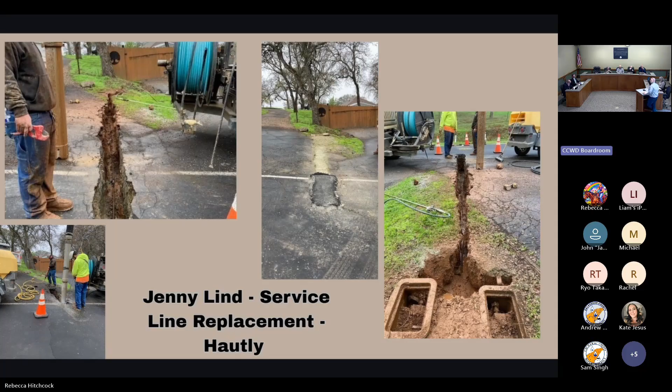As we like to start every operations report with Jenny Lind distribution system, it's no different here. So, an example of service line replacement on Hautly. As you all know, we have a utility crew focused solely on replacing service lines. Right now they're on Baldwin, so they're going to continue down Baldwin and Rancho Calaveras until those services are completely replaced. Oftentimes the distribution crew, which is a separate crew completely, will expose a service line to make a repair and then find themselves in need of replacing it. That's kind of what this is an example of. So they blow down, they see what's going on, and then they just make the call that they're going to replace the service. In this case, you can see it's a dual service, we call it, to two different meter sets, shown in the bottom picture on the right.

Okay, and then this is an interesting one. This is at the La Contenta waste plant. We have a potable water service that feeds water to the La Contenta waste plant for, as you can imagine, any number of things, but most notably there's a bathroom, a sink, and a laboratory there. This is on CCWD property. The water line was installed years ago. This is a large area, so our guys had a general idea of where the water line is. However, they don't know completely.

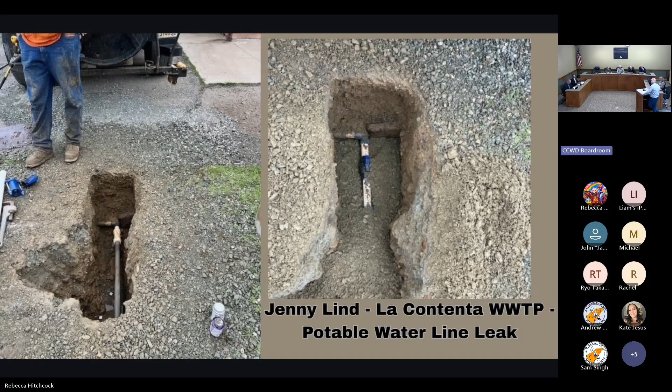So they have to expose the line and then follow it, and that's what they're doing here. They note there's a buried valve in the image on the right, a coupling in the image on the left, and a T. Then they continue to look for the leak, the source of the water. The first thing we had to rule out on this location is that it wasn't wastewater, wasn't sewage, and wasn't leaving the property. That was very important, because if it was, we would have had to report a spill, essentially.

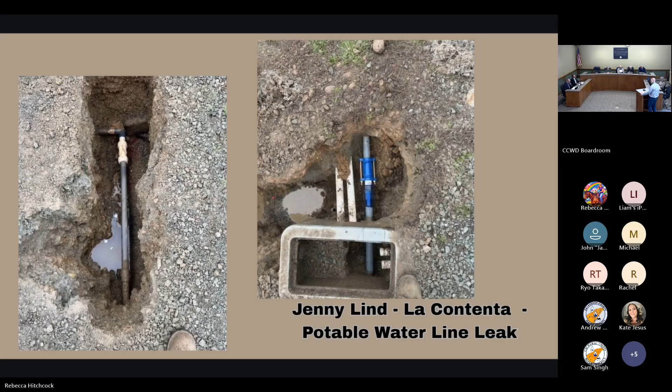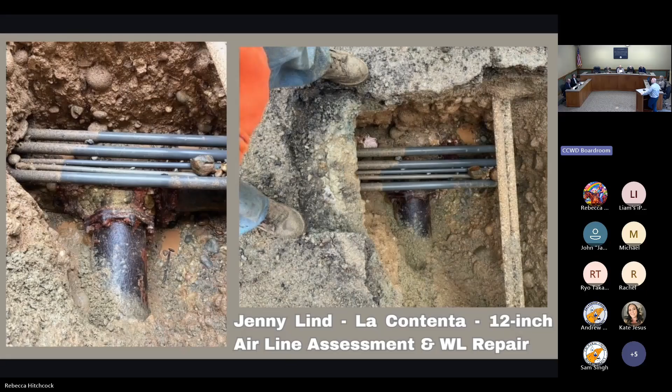So the guys continue to look, and then the construction crew gets involved because we notice on a rainy day that when the blowers at La Contenta kick on, you could see air coming out of the asphalt from the laboratory building. So we might need to take a look at that airline. The airline is large, it's 12-inch. As our team exposes the 12-inch ductile iron line in the image on the left, under all the electrical conduit, we start to assess how we're going to replace this, because that aggressive soil has eroded that ductile iron pipe away. Lo and behold, the crew finds the source of the water line leak in the image on the right.

You can see that coupling and you can see water spraying out of it, so they make a repair. It's often like one work effort flows into another. So we have this exposed 12-inch ductile iron line that you guys can see is significantly corroded and needs to be replaced. We start developing an operational plan. The construction crew of Pat and his team, and Jesse and his team, get together and talk about how they're going to work through this issue and replace this line. And then you make the water...

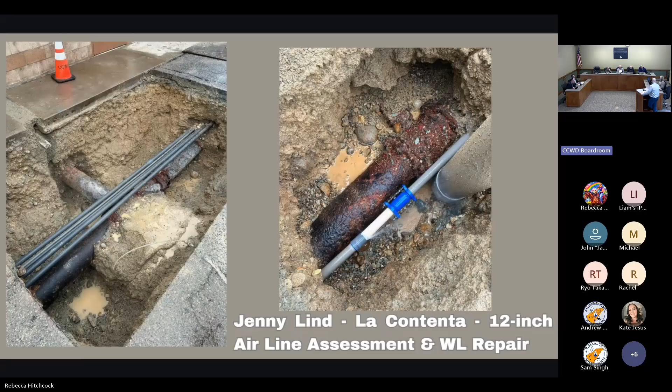Here's an interesting one. The image on the left is an air relief valve. A water line needs to evacuate air periodically, so you put in an air relief valve at a critical point. As air flows through the water system—whether entrained air or dissolved oxygen coming out of solution—it burps out of that valve.

And those are prime targets for vehicles. Cars love to run them over. There's like a magnetic attraction to air relief valves, and so they're often destroyed.

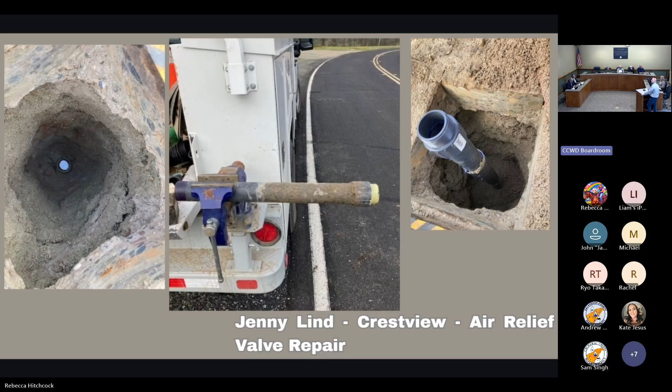What you see here is the mechanism on top of the standpipe was broken. Our crews shut the water line off, unthread the standpipe—you can see it in the vise on the truck—then install a new standpipe, put a new air relief valve on, and backfill the standpipe line, usually with AB rock and drain rock, and put it back in service.

There's a float inside that green mechanism. As air comes in, the float drops and the air can burp out. Then when the water comes back in, it seals the valve—that's an air relief valve.

How close are those? They stay that far out of the ground and they're pretty close to the roadway? They can be well off the roadway. They're in any number of places.

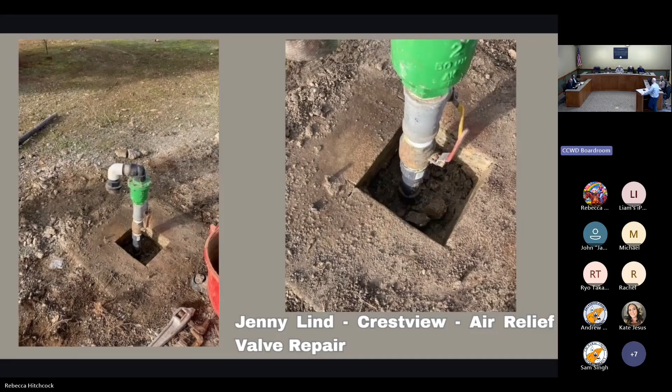Sometimes when we can, we'll install protective bollards in front of them, depending on where they're at. Usually they'll have a box, some sort of cover over them. They can be subject to freezing depending on what size they are, so that's also an issue we have to pay attention to depending on where they're at.

This gives an example of some of the conditions of our pressure reducing valves out in the field. This is in the Jenny Lind service area, Garner and Friedman. A pressure reducing valve—you have a large valve, and usually a bypass valve.

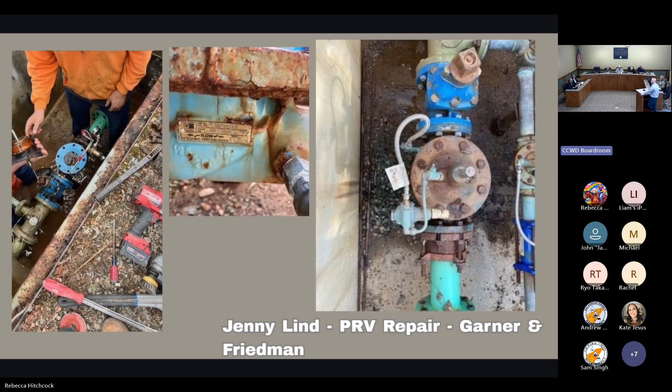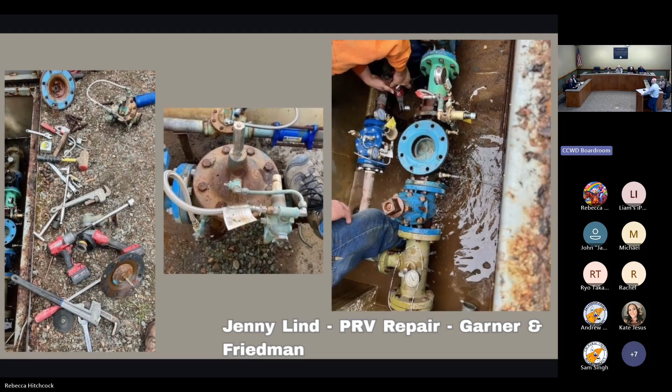The work here is a little convoluted, but in the image on the left you can see they're taking apart the large valve to replace the components inside—there's a diaphragm, small operating equipment and components. The bypass valve they just replaced completely. In the image on the right, you see that nice clean blue apparatus in the middle of the picture—that's the brand new bypass.

Some more images of the two close up—before replacement on the left, after replacement, that nice dark blue one on the right.

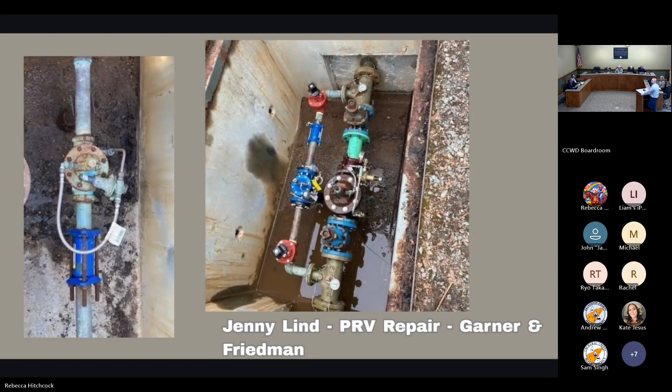We have buried valves all over the system, so as our folks find them, they like to expose them and work to ensure they're not buried again. You can see we poured some concrete slabs around these valves and built a retaining wall so soil doesn't cover them up. Otherwise you'd go try to isolate a section of your water system and spend four hours with a metal detector looking for a valve buried under six inches of dirt. This eliminates that effort and makes things more efficient in the future.

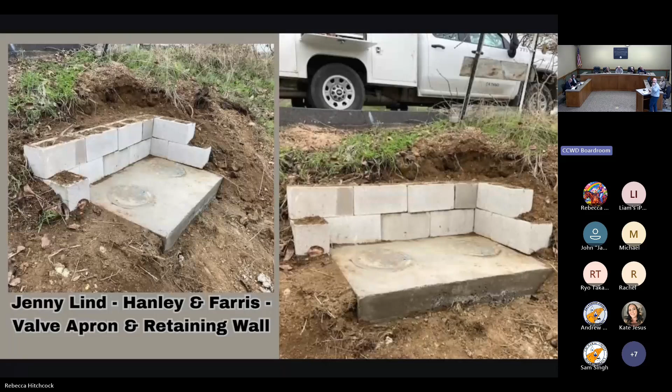There's this building that used to exist at Vallecito that we've moved all over the service areas, and here's another example of that—the construction crew moving this overhang building that we're going to use to cover rock and material in La Contenta.

Some of you may have heard of this—there are some manholes in the Woodgate subdivision where there's a swale around the collar of the manhole. CCWD is working to reestablish the grade on the manhole lid there, so we've saw cut around the manholes. This job is in concert with the county—the county's going to reestablish the grade on the roadway as the district repairs.

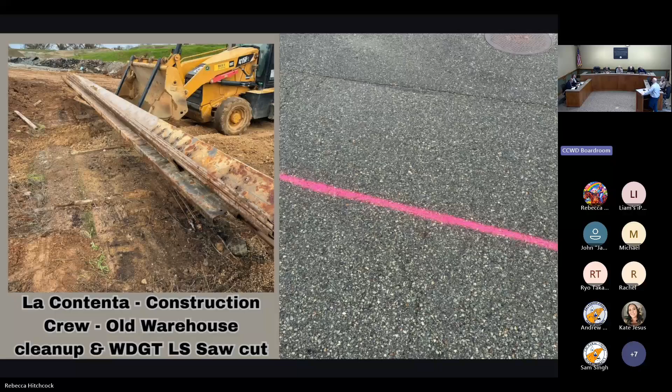Where's Woodgate? This is Vista del Lago North. You hang on the left. Oh okay, yeah, Warmwood, Woodgate. Yeah, across the street. Now we're jumping up into West Point.

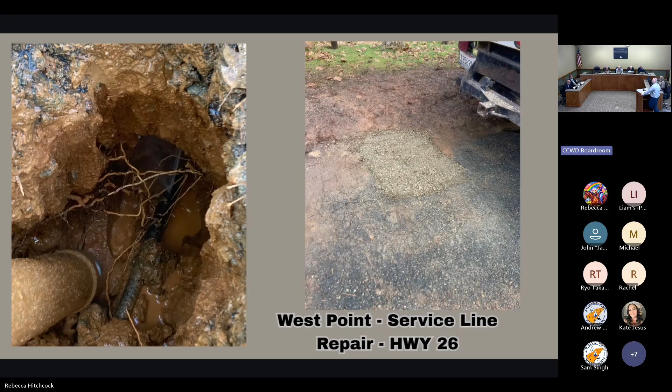Another example of our folks' ability to listen for a leak and make a repair, exposing the leak pretty much right on top of where it's occurring. Obviously we want to minimize patches in the roadway, so it's important that our folks listen and mark an accurate location to dig. This is an example of that. Hats off to Doug and his team up there. It's a team of one.

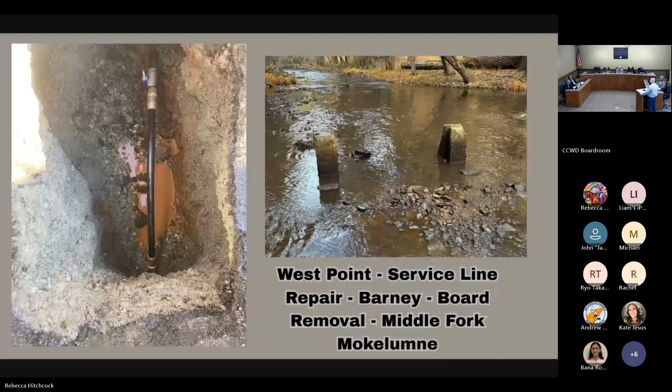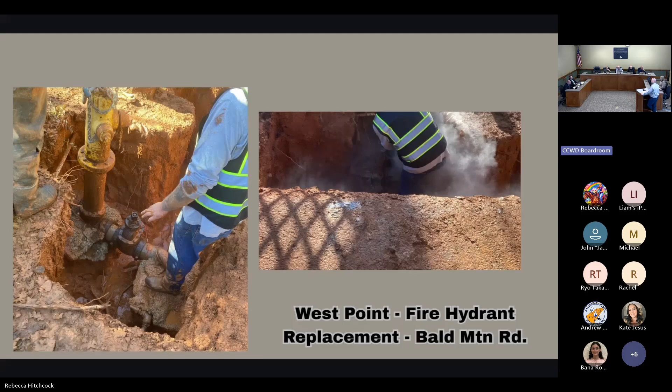The customer's private plumbing then came back towards the fire hydrant, which you can see in that pipe at the top of the left-hand image. Making sense of all of that on the fly is kind of an art, and our guys do that every single day, so hats off to them. They need to know what pipe to disconnect and what pipe to leave live, and this is an example of that.

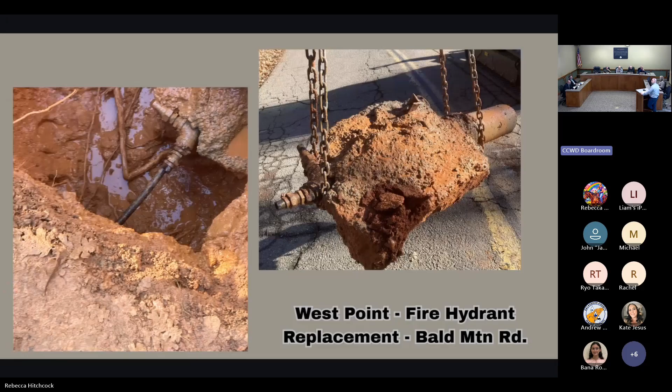You can kind of see that service in the image on the left. There's the concrete pour on the fire hydrant kicker on the right, the old hydrant being taken away, pulled out of the hole. This shows the backfill and compaction of the brand new fire hydrant installation with the valve, G5 valve access in front of the hydrant, so you can isolate that hydrant if somebody runs over it and water shoots into the sky, rather than shutting the whole system off. You can just shut that valve right there.

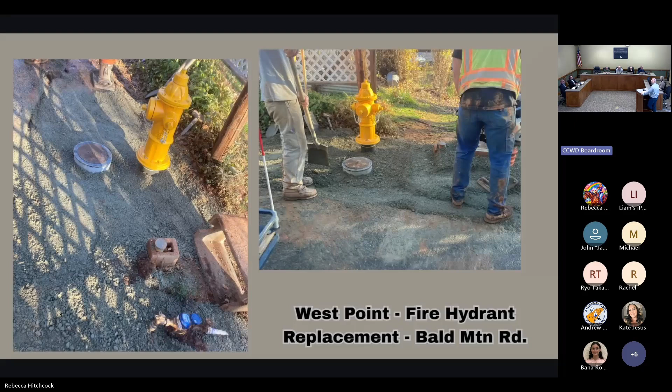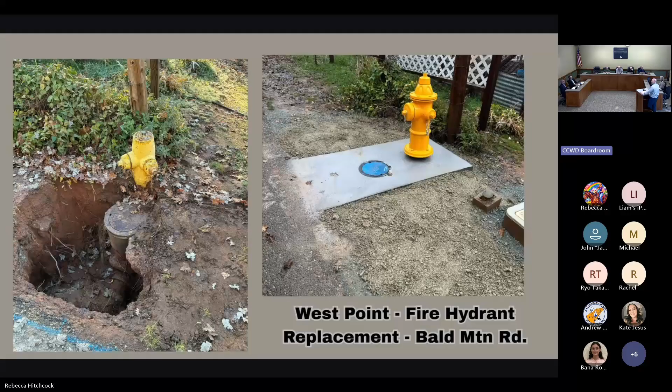Here's a before and after. This is the old hydrant on the left, questionable operation. And the image on the right shows the sanitary concrete apron, the G5, and the brand new hydrant. Hats off to the crew for those.

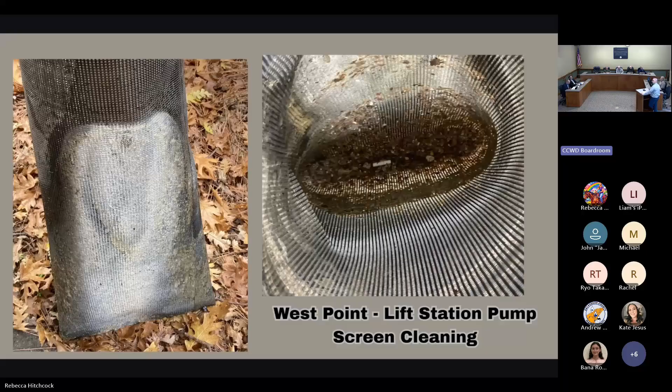This is a great one, I love to share the lift station screen at the West Point lift station. This lift station has pumps that push liquid sewage through a force main, a couple miles cross country, over a bridge, to our West Point wastewater treatment facility. Grease loves to collect on this screen, so Doug will pull this screen every quarter and hot flush it, getting all that debris off so the pumps can continue to operate without pushing up against a head they can't accommodate.

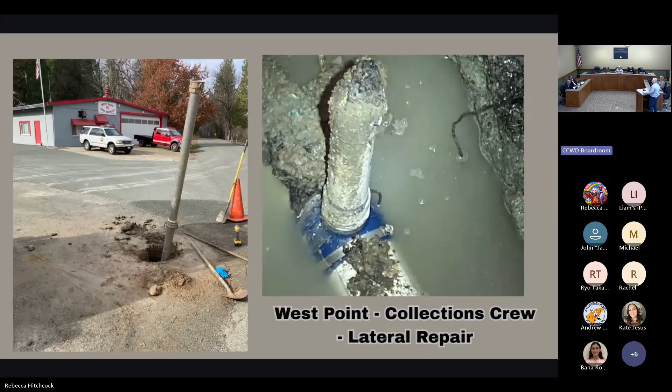So just kind of a case and example where preventative maintenance can lead you to issues that you can then correct other issues. So hats off to the guys for finding this as another holiday gift that I don't know if they wanted it, but they found it and they made the most of it.

So the image on the right, they cut that cap, they cleaned the debris out of it. You can see it's just full of debris. And then the image on the left is coming from the abandoned septic tank, which they flushed, cleaned, evacuated all that water that's in the hole now, and then they reconnected the whole system. So should that septic tank need to be used in the future in the community garden, it can be used.

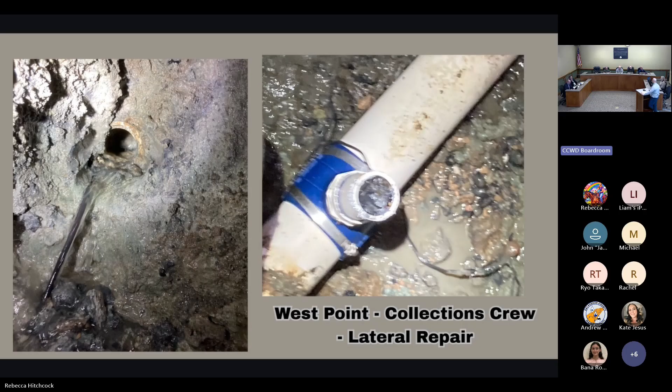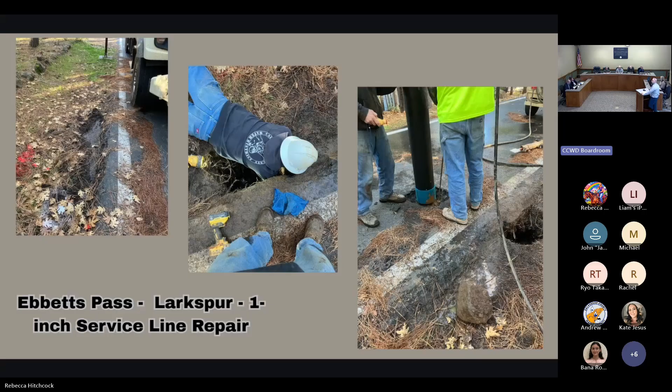Now we move up to Ebbetts Pass. This is a 2-for-1. So there's a 1-inch service line in Larkspur, and there were 2 leaks on it. You can kind of see, just orient yourself. You've got the hole in the image on the right, kind of on the fog line, and then our folks are opening up another hole with the Vactor truck. And you can see the pickup tube there. It's kind of hard to see, but there are 2 separate leaks on that service line.

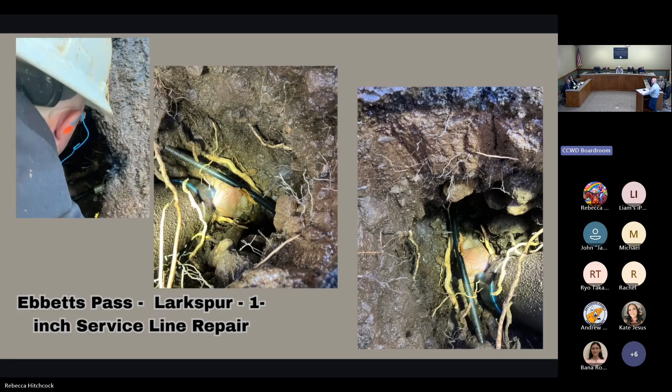You see all those roots in there wreak havoc on our system. They find a little bit of water, they're going to go in ahead, choke whatever it is they find, and ultimately break it.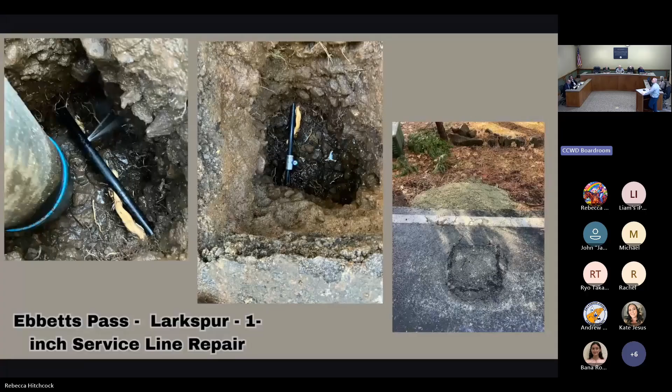Here's a better view, you can see the water spraying out the top of that in the image on the left. And then just an example of the backfill in the image on the right, and then the reestablishing the asphalt. So if you cut out a section of asphalt, you can keep it intact, drop it right back in. Hats off to the guys on that one.

Another 1-inch service line repair up on the pass. Just kind of an example of the variability with backfill material that our guys find, and their ability to get into small restricted places and make the work happen.

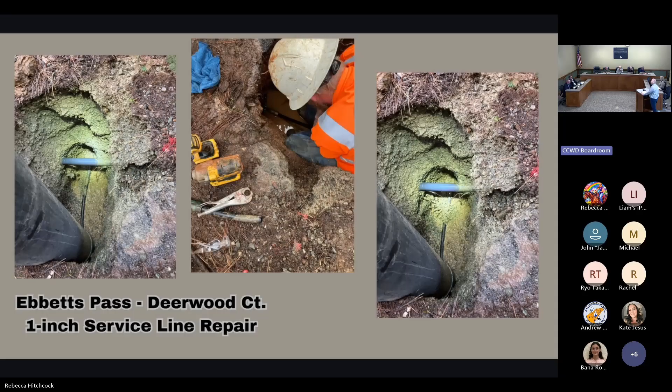You can see in the image on the right, it's kind of just off the road, and CCWD issued an underground service alert. You can see there's power right there, there's a red flag in the image on the right. So our guys all of a sudden find themselves having to contend with power.

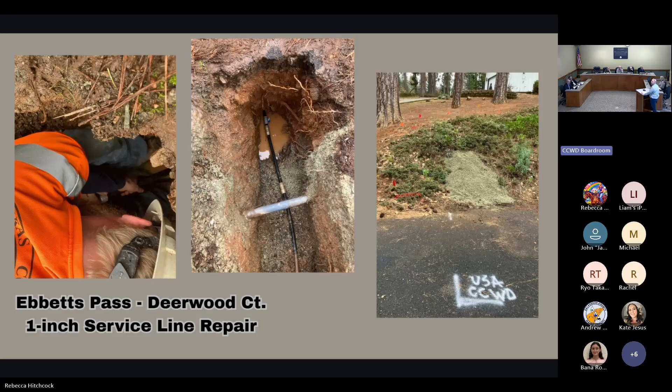Curb stop replacement. So you guys get to see an example of what a curb stop looks like, often connected at your meter to your service.

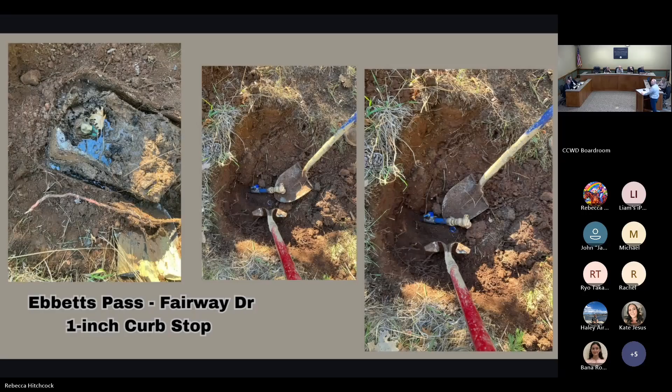Maybe this works better as a blow off. What kind of pressure is on a line if you've got a 1.5-inch line? It's going to vary, really going to depend on where it is within the system. I mean, we can have 120 plus PSI, or you can have 40. There's so much pressure variability throughout the system.

And I'm not sure, you guys, Kelly or Pat, you guys might know what the pressure is on Horseshoe off the top of your head.

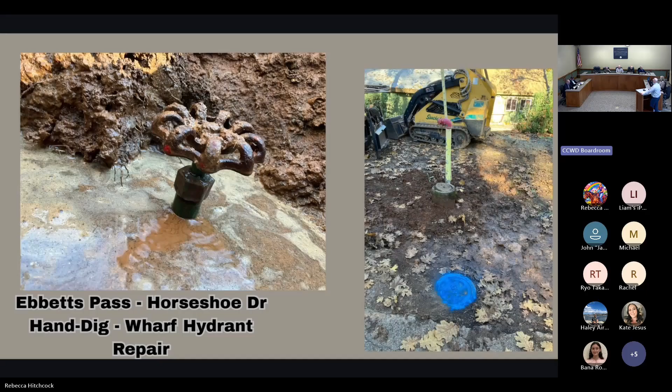It's 120 PSI on a 1.5-inch line, enough to do a lot of damage. You can cut through some stuff. But 40 PSI, not so much.

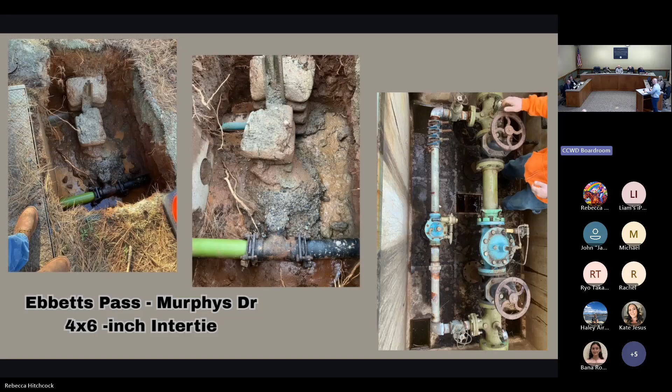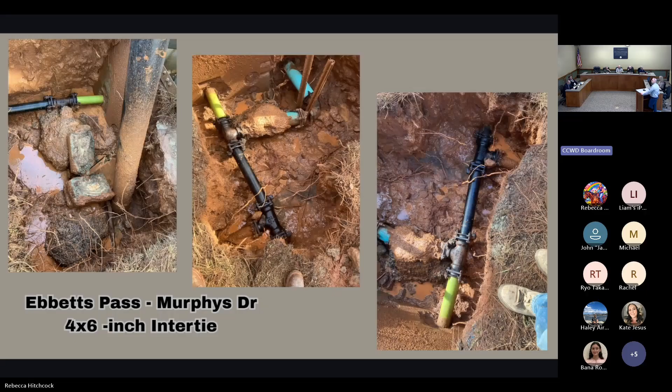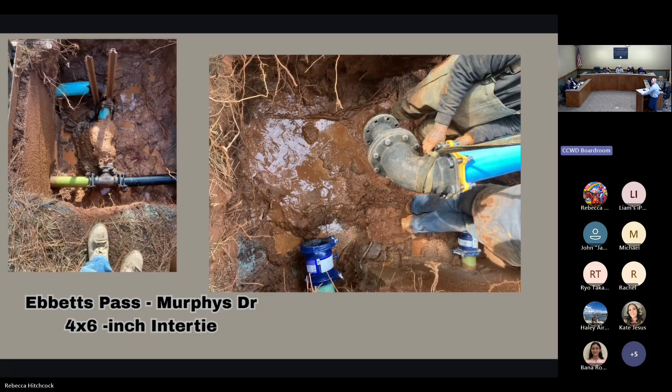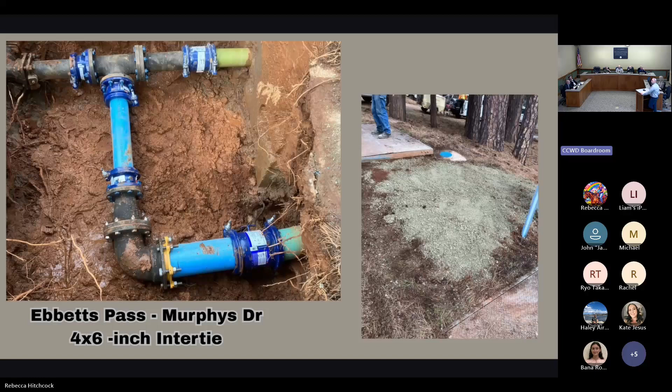Our construction crew worked with the distribution team to reconnect these pipes. These are the stages of construction. You can see a concrete kicker in the middle image that needs to be pulled out so the line can be reconnected to that T. The work continues. The image on the right reminds everyone how heavy this material is. You've got a crane slowly lowering the piping into the hole, then connecting it as shown on the left, backfilling and compacting on the right, and reestablishing that piping intertie.

Is that on the homeowner side of the line? This would be on our CCWD side.

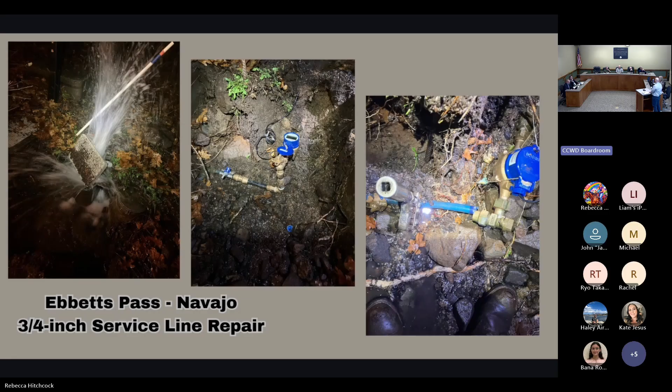Part of the art is determining that, trying to understand what's going on. In a situation like this, you have to slow the water down to see what's really happening, as in the image on the left. A lot of the conversation between on-call and customers is trying to understand and get them to give a little more information so you can assess what's happening, because when you deploy it's a lot. You want to make sure it's a district issue. In this case, the photo on the right is at 1 o'clock in the morning.

That's not me - that is our illustrious collection worker, Tommy, who seems to be everywhere all at the same time. He does have a great haircut. In the center image you can see what they're cleaning off - all that debris shot out of the meter box, sand all over the place, right next to a concrete landing or maybe part of a driveway or porch.

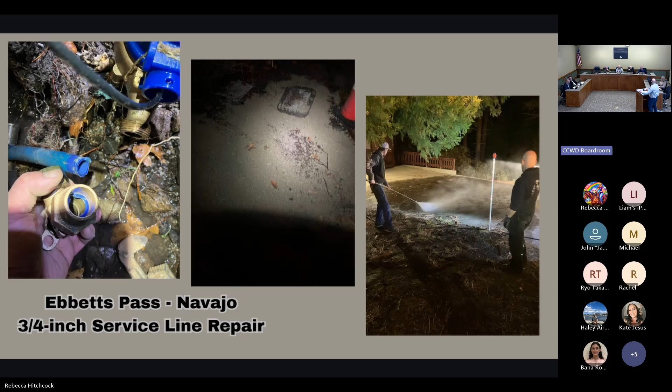Is it unusual to have that kind of debris in one of our water lines before it gets to a homeowner? Well, it wasn't in the line - when the leak happened, the pressure blew all the material around the line out and onto the asphalt or concrete next door. Our guys aren't going to just drive off and leave that pile of debris sitting there - they're going to clean up the mess, and that's what they're doing.

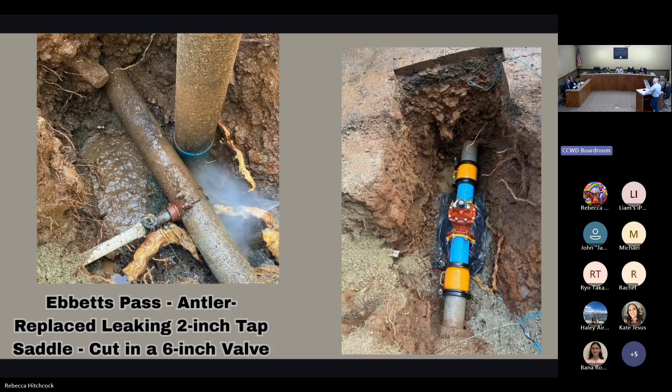Here's an example of replacing or cutting in a 6-inch valve in the image on the right, and also replacing a leaking 2-inch tap.

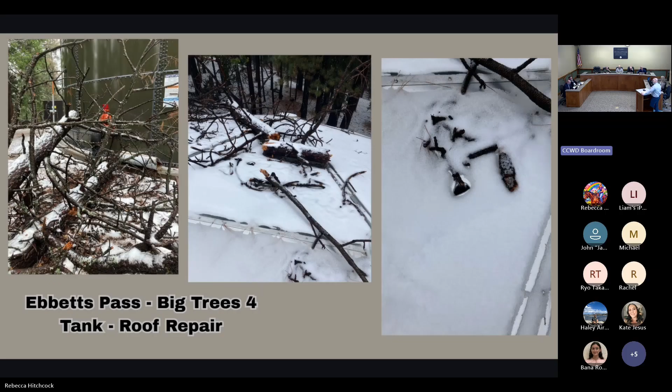We're diving into some unique failures that happened. A tree fell on the roof of Big Trees Tank 4 and poked 4 holes in it as it fell. This was the day after Christmas, and our crews were assessing the damage. You're not necessarily going to get a call from SCADA about a tank with a tree on top of it. That tank was only 3 years old, so it's imperative we get those holes covered up ASAP.

So our crews are up there - you can see in the center image our mechanic is tied off. He has a fall protection lanyard connected to the railing of the tank's ladder.

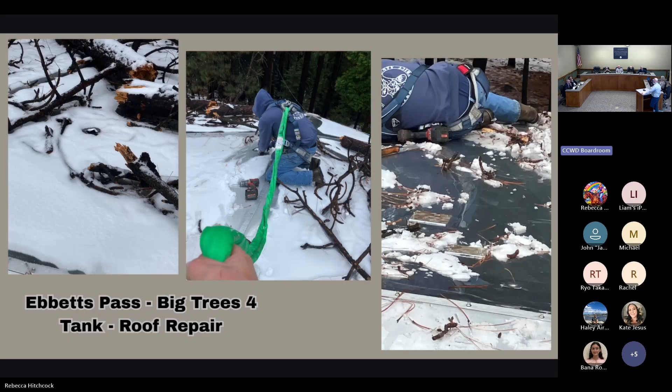Our distribution crew leader is holding the lanyard up so it doesn't get caught on anything while a coworker is on top of the tank, riveting disinfected aluminum covers over those holes. You can see in the image on the right those little square metal covers on the roof. Hats off to the guys working on top of a sloppy, 20-foot wet condition - this is a great example of making do with what you have.

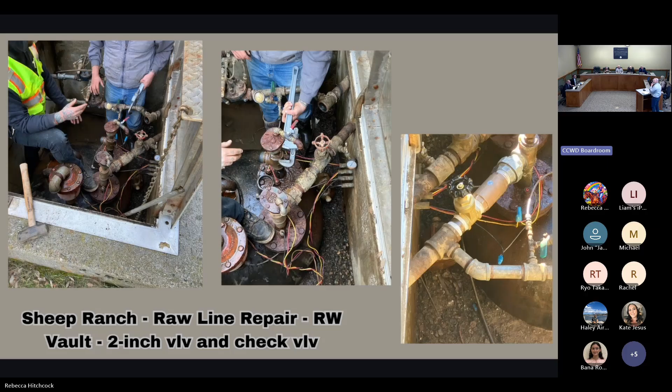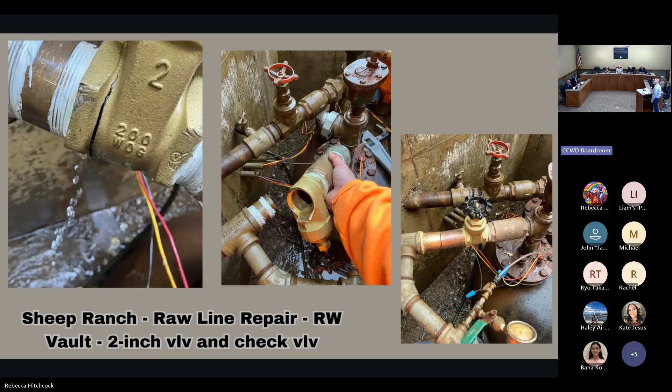The raw line vault at Sheep Ranch is an interesting vault in and of itself. In that vault, there's a 2-inch valve and check that failed. Our distribution crew and construction crew worked together to install a new 2-inch valve and check valve - the brass in the image on the right. The image on the left shows the existing check had essentially split. This takes water off the Sheep Ranch pipeline conveyance from San Antonio Creek and pumps it up the hill to the Sheep Ranch water treatment facility, where it's treated for community use. The image on the right is the raw water vault.

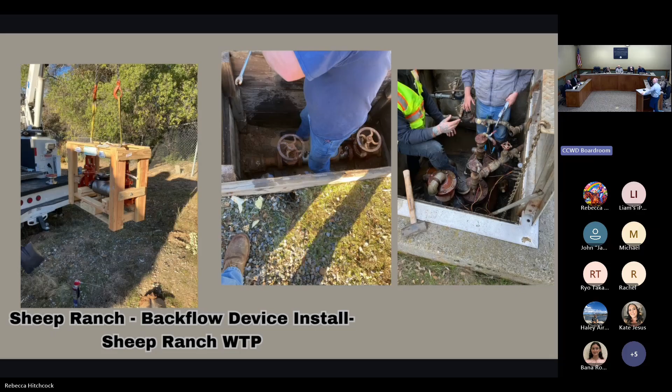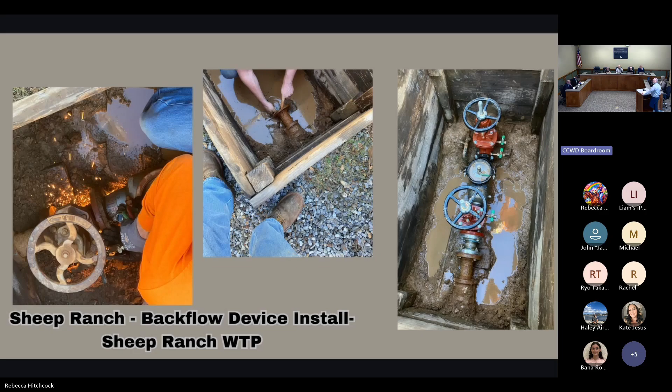Our mechanics then turned around and worked with the operators to install a new backflow device at the Sheep Ranch water treatment plant. The old one was quite old and in need of replacement, shown in the image on the right. You can see the brand new check with new valves and everything installed. Sometimes you've got to cut things, sometimes you've got to weld out in the field - the image on the left illustrates some of that.

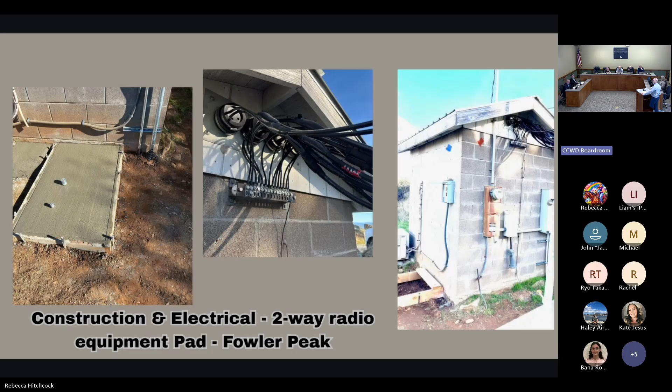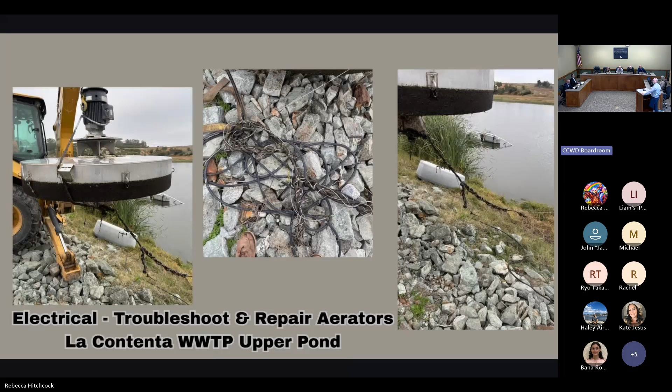Some more work with the electrical team, repairing aerators at the Upper Pond La Contenta Waste Plant. You can see how big the aerators are before they go down into the pond.

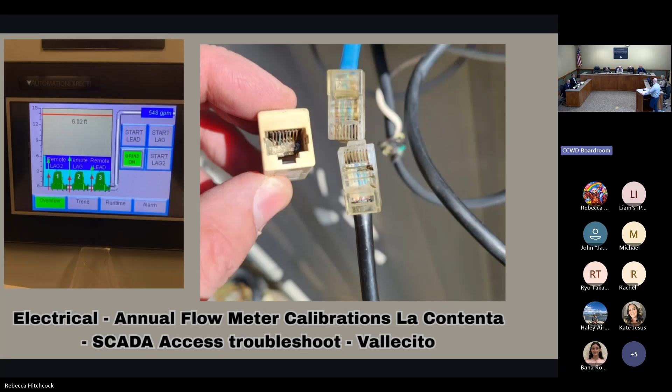Here's an interesting one. You can see in the image on the left how you test your flow meter calibration - you look at SCADA images of what the flow was 10 minutes ago before you calibrated, what the flow is now, how far apart you were, and what the 4 to 20 milliamp signal tells you. The image on the right is an example of spending all night trying to find out what's going on with SCADA, and realizing it was just a defective connector between two Ethernet cables.

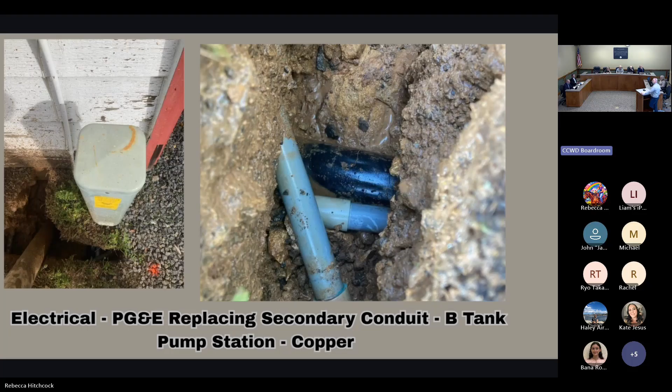PG&E work at B-Tank and Copper, replacing secondary conduit. Our crews basically have to work with PG&E to ensure our facilities remain safe and aren't inadvertently damaged in their process.

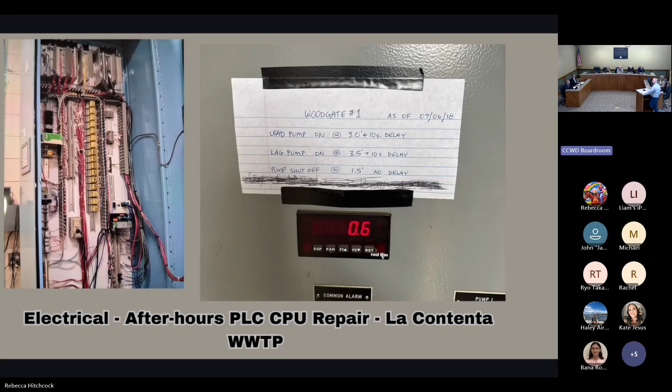Here's a PLC CPU repair at La Contenta Waste Plant - an example of our electricians out at all hours of the night making repairs. And finally, we publicly accepted bids for the critical facility generator replacement project here in this boardroom, and anticipate bringing that to the next board.

I have a question. Some of our constituents have pointed out that our leakage exceeds state standards. I'd like a brief answer - I don't want an in-depth one - but are we working to meet that state standard? What's the big picture on leakage? We have so much water that relative to the cost it wouldn't be something we'd do, but is that something you're working on?

Absolutely, the short answer is we're absolutely working on it. We have a utility crew whose only job is to replace service laterals. Remember too, we have 6 different distribution systems, so the severity of the issue varies depending on the service area. It's no secret that we've talked about the La Contenta or Jenny Lind water system and the Copper Cove water system being the most leak-prone, if you will.

And so that's where the focus remains for the utility crew. Capital improvement projects also help to address this. We do have an understanding of how we have improved over time with both capital improvement project implementation and service lateral replacements. We are starting to see a shift in basically the amount of leakage that we have.